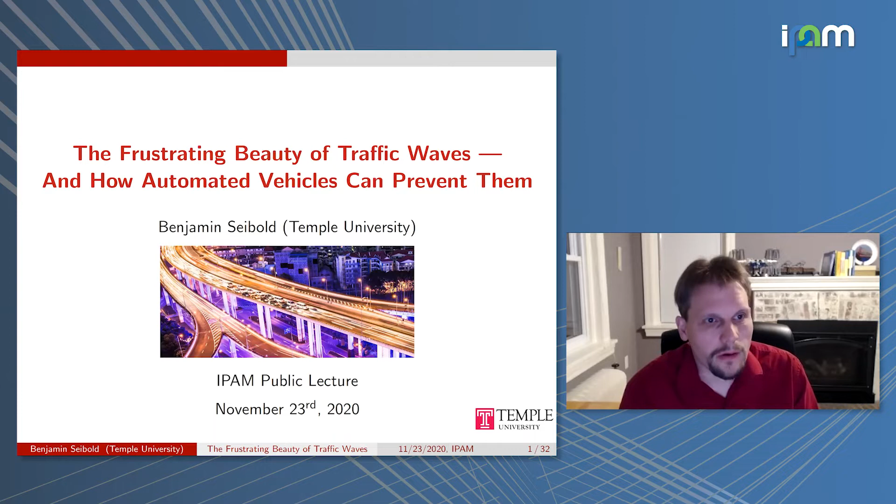So I hope we can have a nice tour of traffic flow, traffic waves, and automated vehicles. So I call this talk The Frustrating Beauty of Traffic Waves and How Automated Vehicles Can Prevent Them. So I'll talk a little bit first about traffic waves, then about instability, which is an important point here, and as a creator of structure, not just traffic waves, but many other things in reality, and then talk about traffic modeling and simulation, which is one aspect of IPAM bringing together many scientists from different disciplines to understand things, and then the role of autonomous vehicles or automated vehicles in the context of these traffic waves and what one can say, and then conclude what this could mean going forward.

So to dive right in, one phenomenon that many people probably have encountered when you drove is what people call the phantom traffic jam phenomenon. Essentially, it's a local slowdown, but there's no discernible cause. So you have to brake because the person in front of you brakes, you make the person behind you brake, and you look around and there's no discernible cause for this slowdown. And one can think of this oftentimes as, even if you initially have uniform traffic flow, it becomes unsteady, inhomogeneous, even in the absence of obstacles.

So unlike a traffic jam where you go fast and then you suddenly have to go slow, these phantom traffic jams are oftentimes traffic waves, in the sense that you brake, but then very soon after that, a few seconds later, you accelerate again. What you see on the top right is actually a long exposure picture at nighttime, and you see that most trajectories are blurred from the lights, except for these vehicles that you see there. So these vehicles over the exposure of the image were stopped. And you see it's only a localized stopping. So it's a beautiful picture of such a traffic wave.

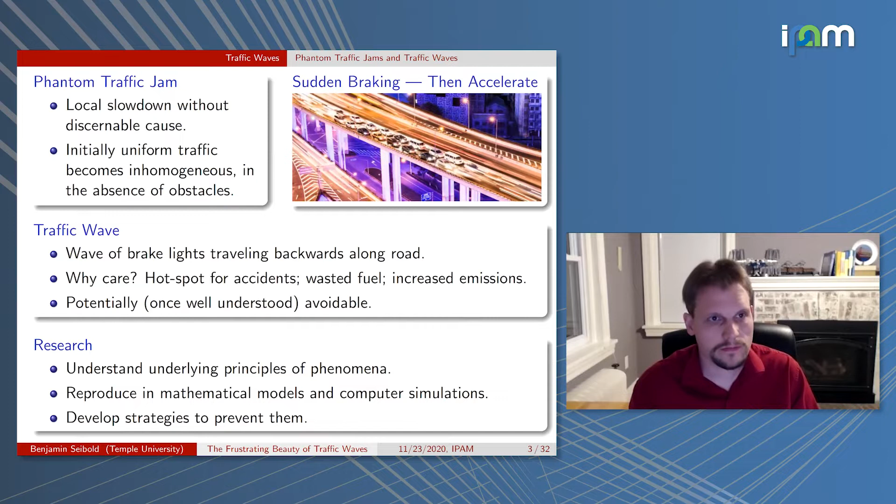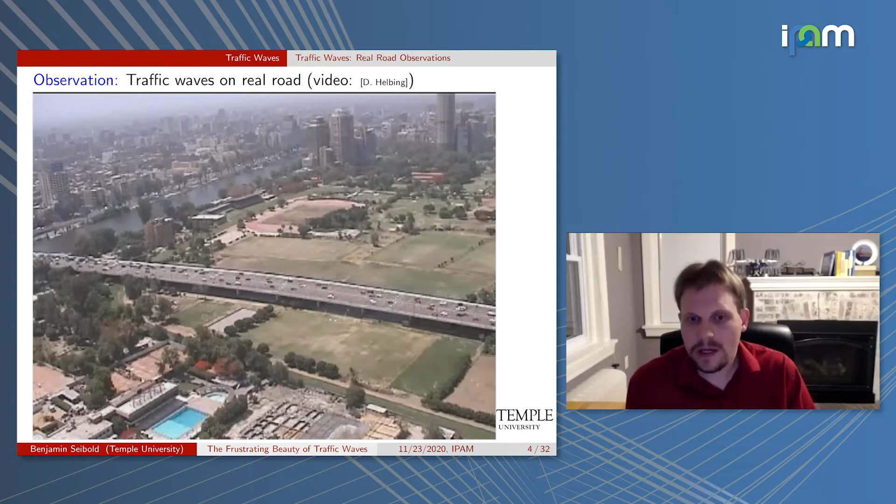So here's a video taken by Dirk Helbing. You see that the traffic leaving the downtown area is flowing relatively smoothly and uniformly, but the traffic flow going into the downtown, there's congestion, there's stoppage of vehicles, but the stoppage is localized. So you do see that, you see it here in some spots.

You see these waves that are traveling backwards, and they're waves of cars that are stopped, but the cars come to a stop for a few seconds and then accelerate again. So these are really stop and go waves. You see another one here on the screen. So these are stop and go traffic waves, and they're waves of brake lights that travel backwards along the road.

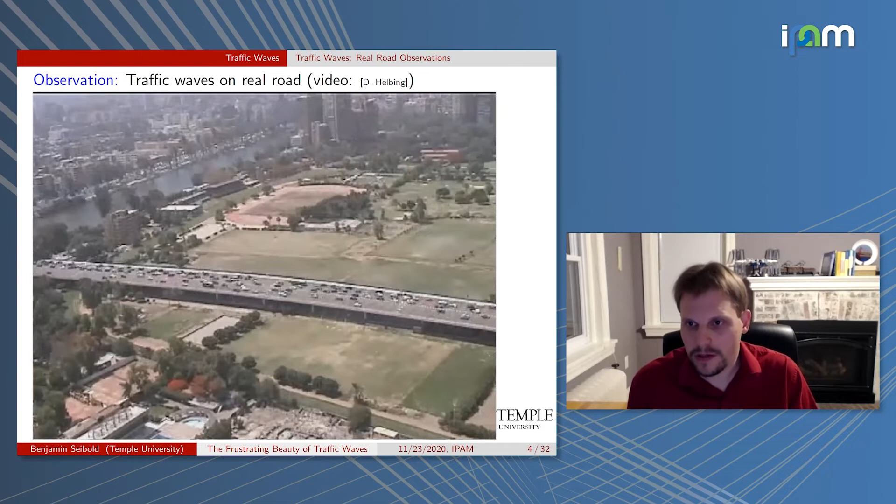Now there's a lot of things happening here. It's cars intermixed with motorcycles, with buses. You have on-ramps, you have off-ramps, you have lane changing. So it's not completely easy to pinpoint what exactly are the ultimate root causes for these phenomena that occur. Is it due to a lane switch, for example? Or would they also happen if you just had a single lane, no ramps, all passenger vehicles? Would you still get these stop and go waves, these traffic waves happening?

So in 2008, a group of Japanese researchers devised this experiment: essentially form a ring road of a single lane, and have drivers drive on that road. Initially, you see they start out uniformly spaced and driving all at the same speed. But it turns out that this uniform flow is actually something that the system does not dynamically like to have. The dynamics drive it away from that uniform flow.

So this was the first experimental demonstration that in fact, these traffic waves, these features that many of us have seen on the highways, these phantom traffic jams, can in fact arise from the simple car following dynamics, the simple collective driving dynamics of the human drivers on the road. It's not that one person triggers it, it comes from the collective behavior of all the agents. So that, of course, is a very, very important fact and a very important observation.

So you see that for a given vehicle density, the one that you have on this road, so the road has a certain length, you have a certain number of vehicles. So it's in this case, 22 vehicles per 230 meters. So for that vehicle density, it turns out that the uniform flow, the desirable flow, everybody goes at the same speed and is equispaced, is actually unstable. So the dynamics drive the system to a different state, not the uniform flow, and in fact, the traveling wave state. And this structure, again, emerges from the collective driving dynamics.

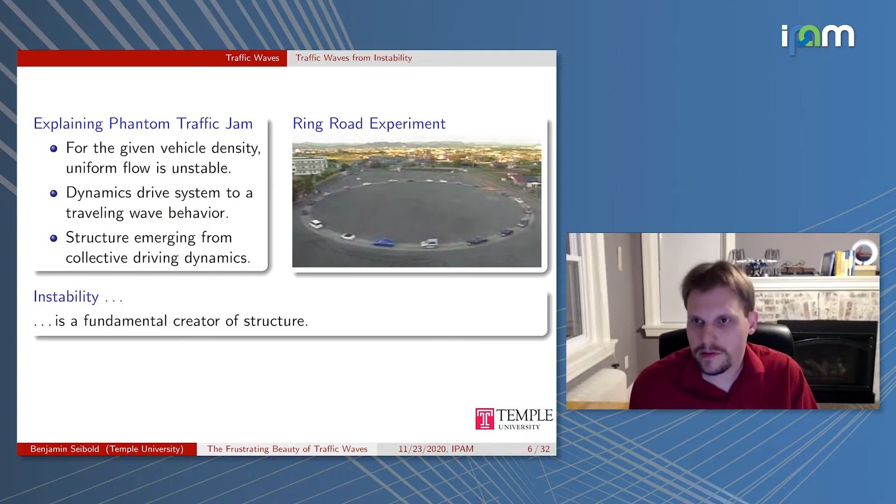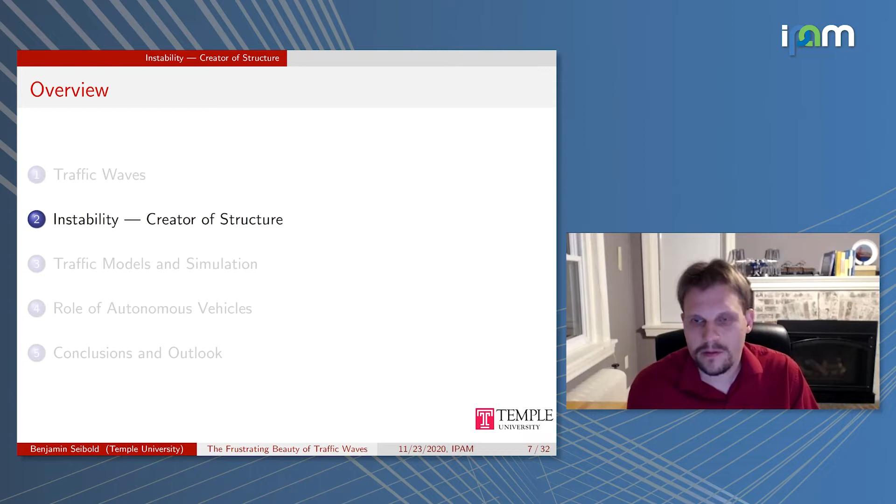So what is really forming these structures, forming these traveling waves here, is an instability. And instability is actually something that does not just arise here in traffic flows, but is really ubiquitous in reality. And of course, also is really interesting to describe. And in fact, I want to move forward by highlighting some of these aspects. So I call this section here, Instability, a creator of structure, because I really want to highlight how ubiquitous, how wide these instabilities are in practice, and how many phenomena and structures that we see are ultimately formed by instability.

But of course, there are always imperfections. There are always small perturbations. So what distinguishes stability from instability, so a stable equilibrium from an unstable equilibrium, is exactly how does the system react to small perturbations. So a stable equilibrium means that small perturbations decay. If you have a pendulum that's hanging down and you perturb it a little bit, the dynamics bring it back to where it started from.

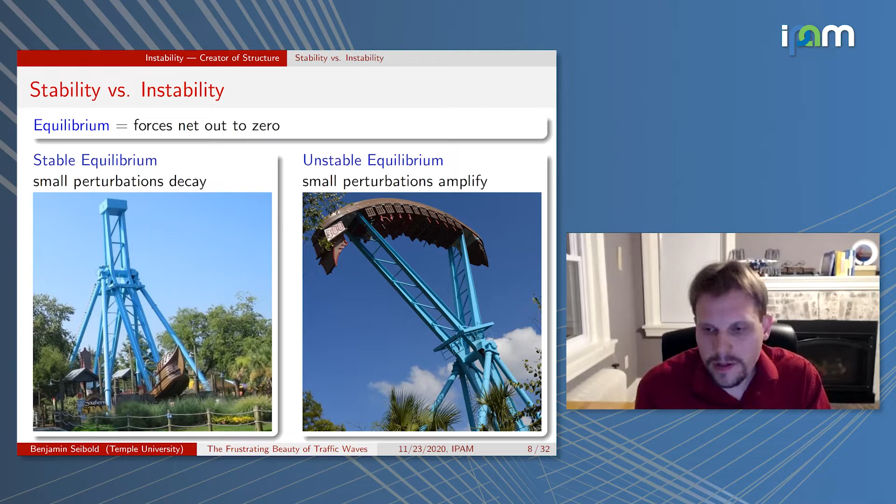How can you explain it? Well, you have an initially flat ocean surface, then you have some wind blowing across the surface. Now, to get the mechanism of instability, you always need to think, what if I had a small perturbation? So what if you had a little bit of a hump on the water? Very tiny. Well, what would happen is that hump now would provide more possibility for the wind to catch on. It would push the water sideways and therefore a little bit upwards, up the hill, and therefore amplify this crest, amplify and therefore grow it.

So whenever you have a mechanism that if you start with something that's initially uniform and you perturb it a little bit, you have a mechanism that amplifies this perturbation, then you have the mechanism for creating structures, in this case, waves on the water surface.

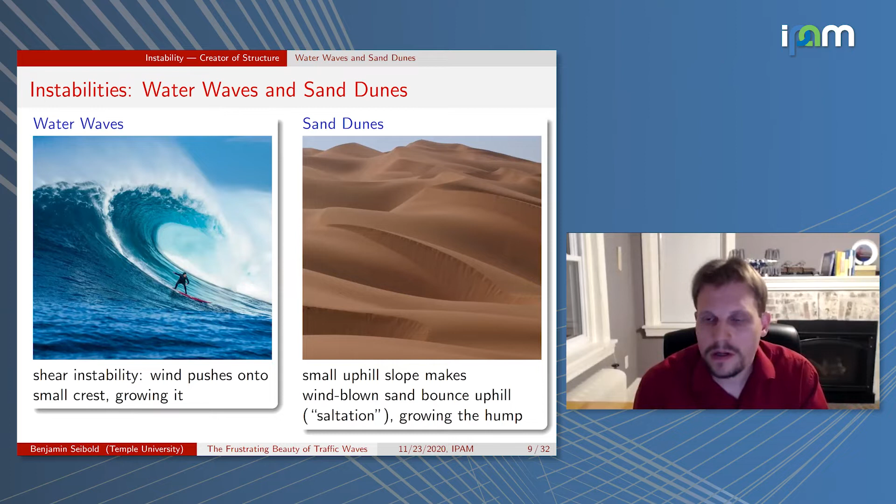Sand dunes follow similar principles. So if you start with an initially flat sand and then you have a little bit of a hump, then wind blows sand, and once you have a hump, it acts like a little ramp and it can catapult sand grains upwards. This is called saltation, and therefore then growing the hump. Now, not every wavelength of humps does it, but there's certain wavelengths where they actually get a growth, and this can grow to sand dunes that are hundreds of meters high.

Snow is white, ice is white, therefore it reflects a lot of sunlight. The water is darker, so it absorbs more sunlight. So at the moment where you get a small amount of water, that water now warms more than the ice, according to sun radiation, and therefore growing that structure that you had. So you start with a small perturbation and that structure grows, and therefore again you have the mechanism for an instability.

Defrosting in a microwave oven. Why do microwave ovens have a defrost button? What the defrost button does is it essentially heats things slowly. It heats for 10 seconds and then it has 20 seconds break in between. If you didn't do that, what would happen? It turns out that microwaves heat liquid water much more efficiently than ice. So if you get a little bit of water forming, that water will be heated much more rapidly than the ice around it. So if you do it too quickly, you can actually get boiling water right next to ice. And obviously that would not lead to pleasant food.

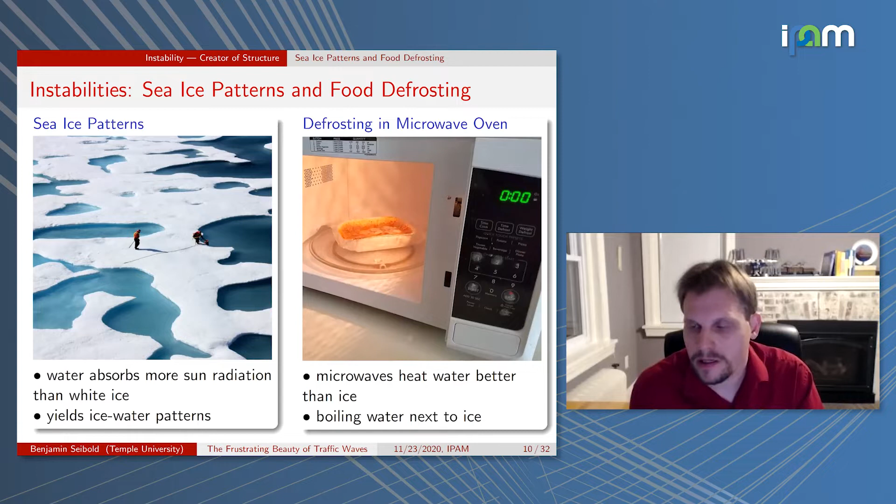Fluids are a prime example where there's a lot of instabilities happening. For example, if you turn on a faucet, just slightly so, initially you get a stream, but at some point the stream starts forming bubbles and droplets. So you get droplets that break off. Again, what is the mechanism? You start with a uniform stream initially, but then you have some small perturbations to it, some small imperfections.

But at the moment where the water stream becomes more narrow at a point, the surface tension contracts it more at this point than in the wider parts, and therefore amplifying the structure and eventually leading to droplets forming and breakup.

Or, of course, beautiful structures like the Grand Canyon ultimately result from instabilities. You start with an initially flat terrain, and then you have a little bit of a dip, a little bit of a channel that's forming. Rainwater will, of course, then run into that channel and therefore deepen the channel. So initially you start flat, you have a little perturbation, and then this perturbation amplifies, and over the course of millennia and then millions of years can form whole canyons that result from it.

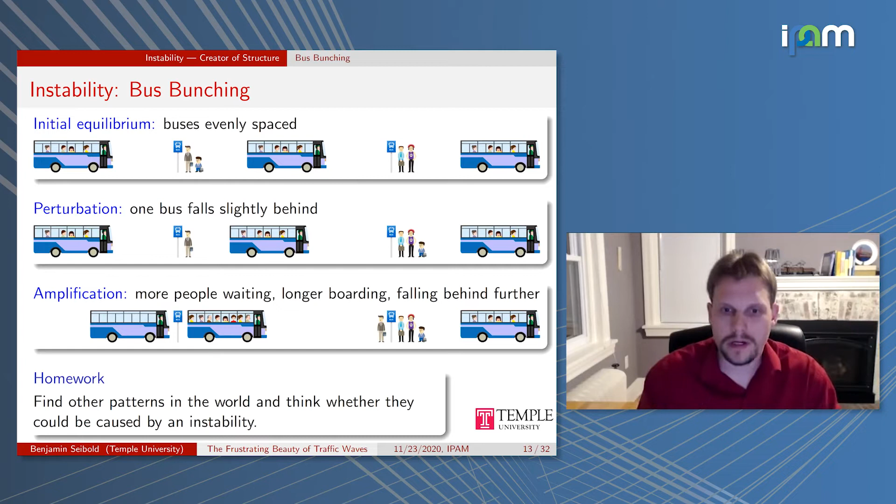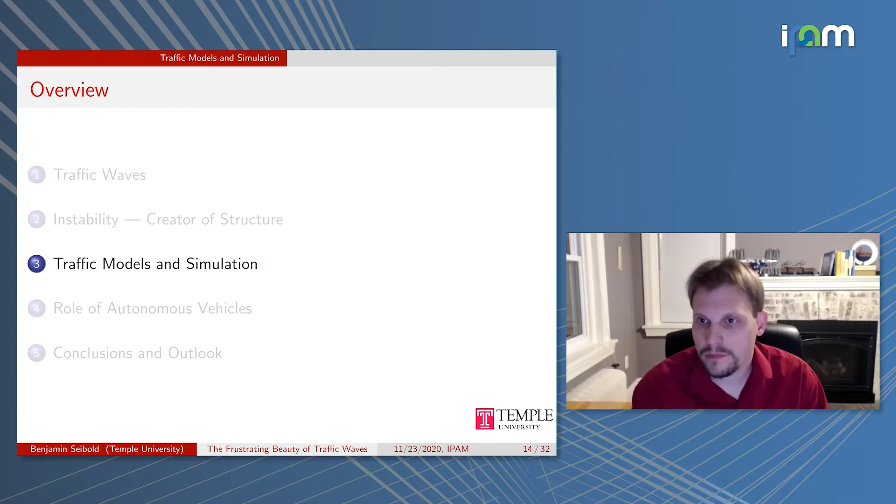Now, having conjectured that traffic waves can be caused by instability, of course, one needs to check whether this is plausible via mathematical models and also computer simulations. So traffic models and traffic simulation is something that transportation engineers, but also mathematicians, physicists, engineers are very interested in, because ultimately it's about understanding this real-world phenomenon.

And when it comes to developing models that describe or reflect reality, or simulations, one can, of course, and should ask, what is the point of this? Why are they needed? Why don't we just observe traffic flow as it exists and classify what one sees and measures? And this is an important question. Why develop and study models of reality? That is not just a question for traffic flow. It's true about every system that is out there.

Well, the first point is you can reduce system complexity. Most real-world problems are extremely complex, but in modeling, you can isolate a few key mechanisms and then test and understand whether they are the dominant mechanisms that form and govern the structure. What is important to remember here is the quote by George Box: all models are wrong, but some are useful. So the goal of modeling is not to describe every single detail about reality, but in fact find the conceptually simplest description that captures the key mechanisms that describe the phenomenon.

So for traffic waves, of course, the question is, what are simple models that capture the instability and produce the wave behavior? Once you have a mathematical model formulated in a mathematical language, you can use computational resources to simulate the model and see what would happen if you, for example, changed model parameters.

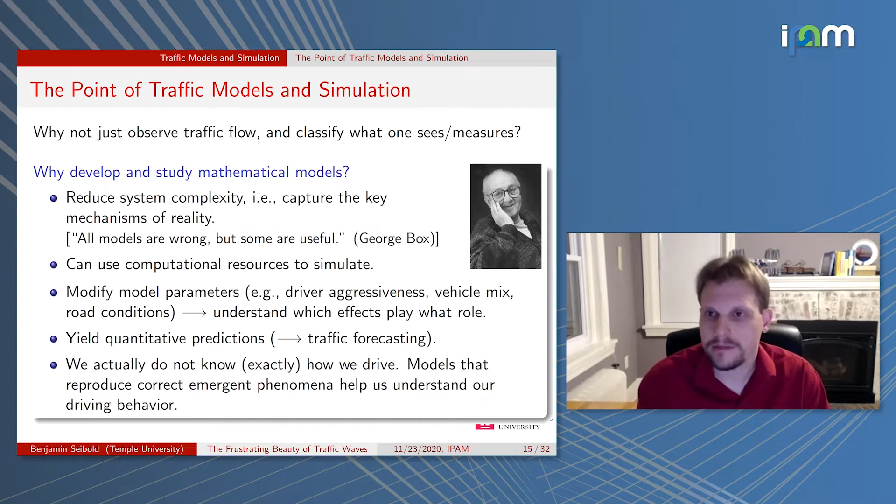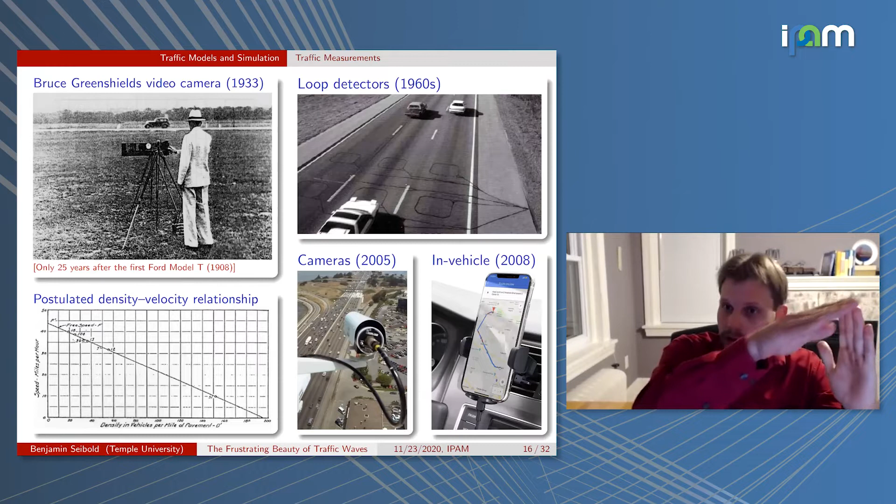So in other words, the speed is some decreasing function of the traffic density. If you have more cars, the average speed of traffic flow is lower, and this is not just a qualitative statement, but a quantitative relationship.

Of course, since then, traffic data collection has gone a long way. In the 1960s, loop detectors were put into roadways, like you see here, that count cars and flow rates and speed estimates. Of course, there's camera systems here, like in this case, this is from a 2005 data set that collects on a segment of highway the trajectories of all the vehicles that then can be used by researchers to get really fundamental insights into car following behavior and driving behavior.

And then obviously disruptive technology was the fact that nowadays almost everybody carries a GPS transmitter with them, and we're willing to transmit our position in exchange for getting quality routing. And this, of course, can also be leveraged to get lots of information about driving behavior.

Now, the difference here is that this was a transition to essentially mobile sensing, so in-vehicle sensing, whereas the traditional means were dedicated infrastructure put into place by agencies. Later, we'll come back to that point also from the point of view of traffic flow control.

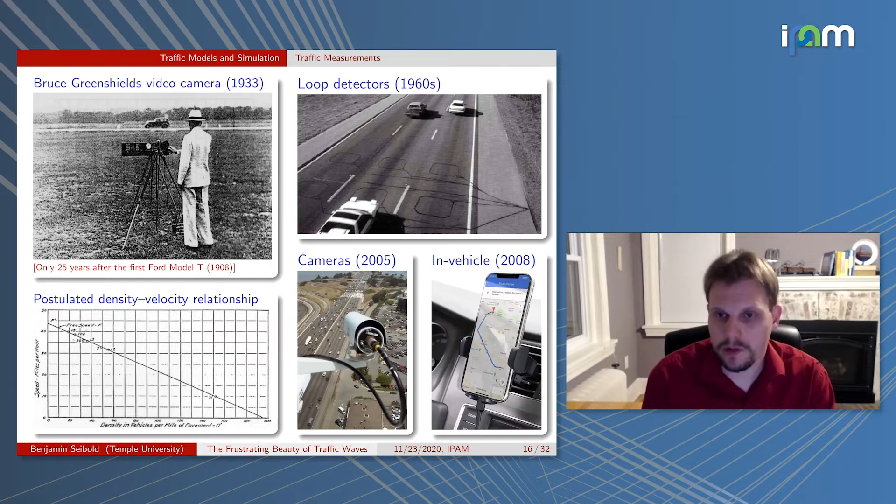Now, once one has some relationship, for example, as we saw in Bruce Greenshields' measurement, you might have a relationship between, for example, the speed that cars would like to go and the gap between two vehicles. So what do we mean by this? You have one car following another car, for example, in one lane on a highway.

The car, let's say front bumper is at a certain position. I call the position X. The car goes at a certain speed. Let's call this V. Of course, the car and the car ahead have a length, and then you have a gap between the cars. So how much open space there is between my front bumper and the rear bumper of the car ahead of me.

And now I can collect data and see that to a reasonable approximation, I actually get a relationship between the speed that cars want to go and the gap that arises. If the cars are very close, bumper to bumper, that speed is 0. And then the speed increases as the gap increases up until, of course, the gap is so big that I cannot really go faster and faster, because at some point I would get a speeding ticket.

So this, of course, will level out at the speed limit, or depending on where you are, the speed limit plus 5 or 10 miles per hour. So this is an empirical law of traffic flow that you could measure. And of course, real measurements will be clustered around here, but you could say this is an approximation.

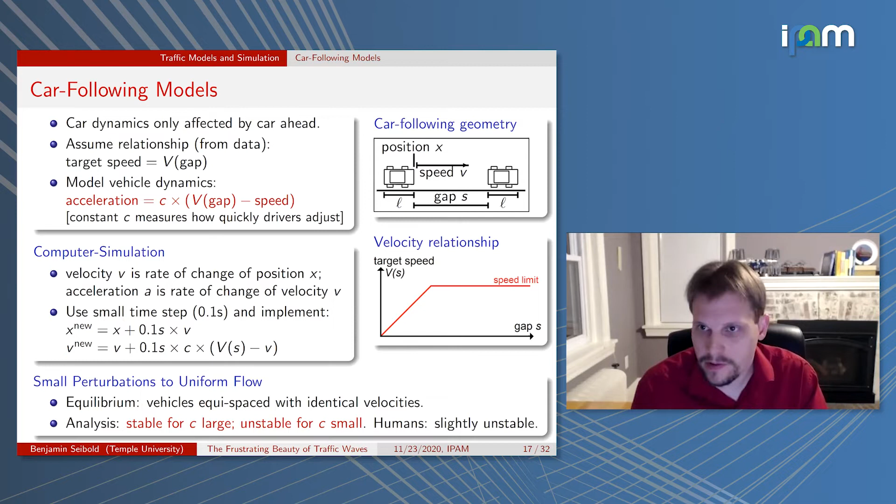And it turns out for this choice here, if that constant C is large, if drivers adjust quickly, then uniform flow is stable and the system will remain close to the uniform flow. On the other hand, if C is below a certain threshold, then in fact you get an instability. And since we know that traffic waves and instabilities and phantom traffic jams happen with real humans on the road, one can actually make this a model for reality by choosing C sufficiently small, but not too small, so that you have slight instability, and that is now a model for human drivers. So since this is a talk of a math institute, here are some equations. The rest will again be very pictorial going forward.

So for example, here you see a video of such a simulation. At the bottom, you see what it means to the individual vehicles. At the top, you see what it means to the traffic density, to the vehicle density, which is this blue curve. And you see that this simulates the evolution forward in time. In fact, there's some theory that might even predict what this traveling wave will be forward in time. That's the orange curve. But you see that whatever goes out on the right comes in on the left. So it's really a ring road that you have.

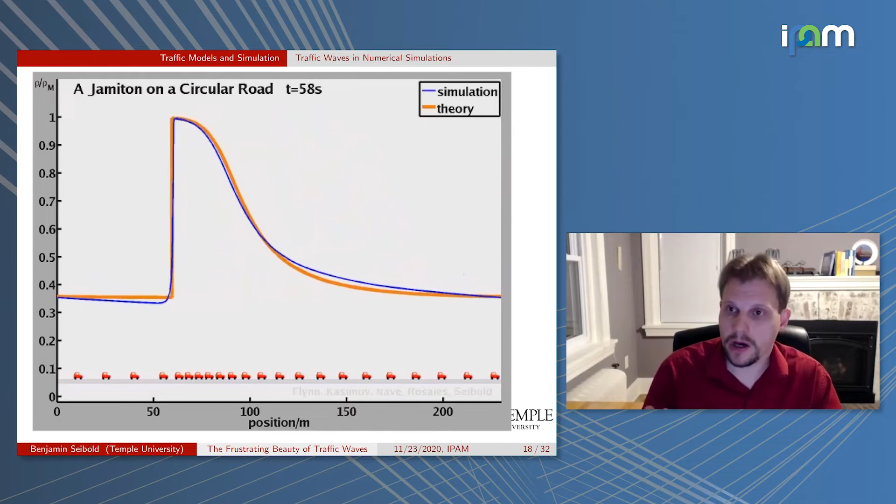The vehicles here form a traveling wave that goes backwards on the road. Every vehicle brakes heavily and then accelerates again. And there's a local region where the vehicles are very slow. So this resembles really the ring road experiment done in 2008 by the Japanese researchers. So this really resembles in simulation what one saw prior. Now, one has a model, and this model, of course, can not just reproduce a ring road.

You can also, of course, investigate what happens if you look at a really long road, 6 kilometers of road now. So 4 miles of road, you had a little bit of perturbation. You have a uniform state that is dynamically unstable again. So these small perturbations here increase the density. More cars get localized in a certain spot. You get this typical braking behavior here happening along the road. These are a lot of vehicles here. So these are zooms here, but these are a lot of vehicles down here. So it really makes more sense even to look at it on the level of the traffic density.

Now this initial pileup, this initial wave now produces a dip downstream. That triggers another instability, triggers another traffic wave. This triggers another dip, another wave, another dip. So you get this whole chain, this whole train of baby waves being born out of the lead wave.

Now, this model now has something to do with reality. It means that if you had a phantom traffic jam, you had to brake because the person in front of you brakes and you look around and you don't see any discernible reason, it is likely that somewhere downstream, 30 seconds later, 1 minute later, you will have another one of these sudden stoppages. And again, that oftentimes agrees with what is being observed in reality.

But it also means from these models that all these drivers are actually identical and they behave exactly the same way and fully predictably. Nevertheless, uniform flow is unstable, small perturbations amplify, and what you actually get is these stop and go traffic wave solutions. So they can arise from the collective driving dynamics of all the drivers on the road. You don't need any bad drivers who are at fault at causing these waves.

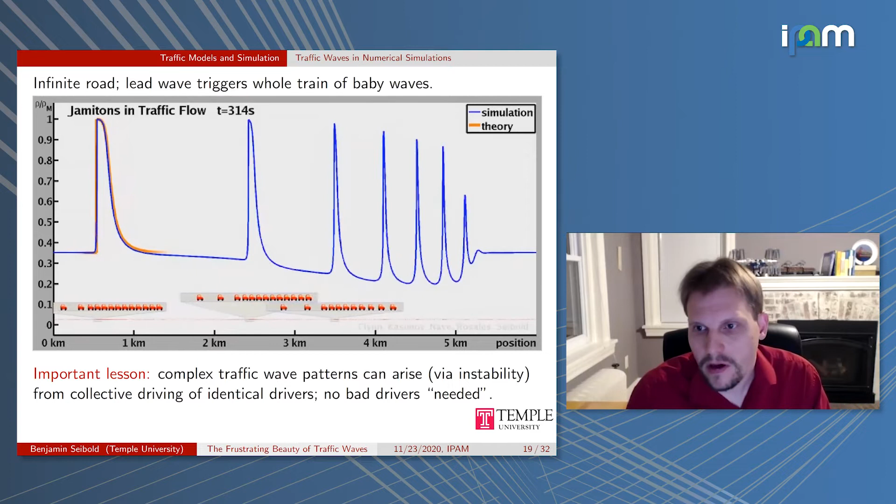Now, that does not mean that there are no bad drivers on the road, but it means that these phenomena can arise even if you have nobody being at fault at causing these waves. It's really collectively us causing it. And one reason why we might not be aware of it is, of course, that what happens due to our driving behavior happens behind us, so we don't necessarily see the consequences of us amplifying wave behavior.

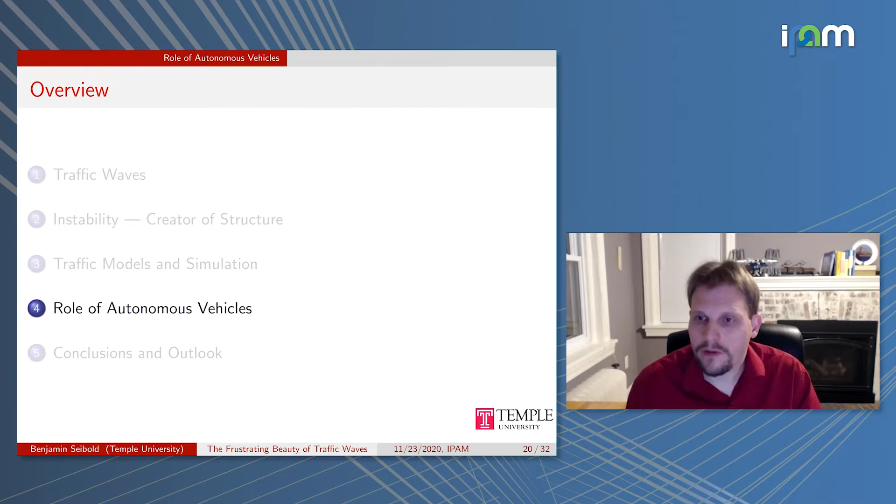All right, so this is what happens on real roads, and this is how we can understand what human drivers do. So now one needs to ask, what is the role of autonomous vehicles in this context? So a common impression of autonomous vehicles is that at some point they will be there, created somehow, and we will suddenly have all the vehicles being autonomous. We don't need to deal with the chore of driving anymore. We can lean back and enjoy that a car does the job for us.

The reality is that fully autonomous cars that don't have a steering wheel, where we can lean back, are really still a distant future. I will say on the next slide some reasons for that. But it turns out that if you talk about automated or semi-automated vehicles, there's a lot of very, very smart technology already in modern vehicles that one can buy, not just the high-end vehicles, but really consumer-grade normal vehicles have, for example, lane assistance. They have adaptive cruise control systems, a cruise control system that doesn't just keep a constant speed, but slows you down as you run closer to the car ahead, so you don't need to disengage it, even in heavier traffic.

So there's a lot of potential due to vehicle automation and also vehicle connectivity, vehicles exchanging information with each other, that can be explored and might actually modify the way traffic flows in the near future. And particularly interesting, of course, here is the question: could vehicle automation dampen these traffic waves and prevent the instability from arising?

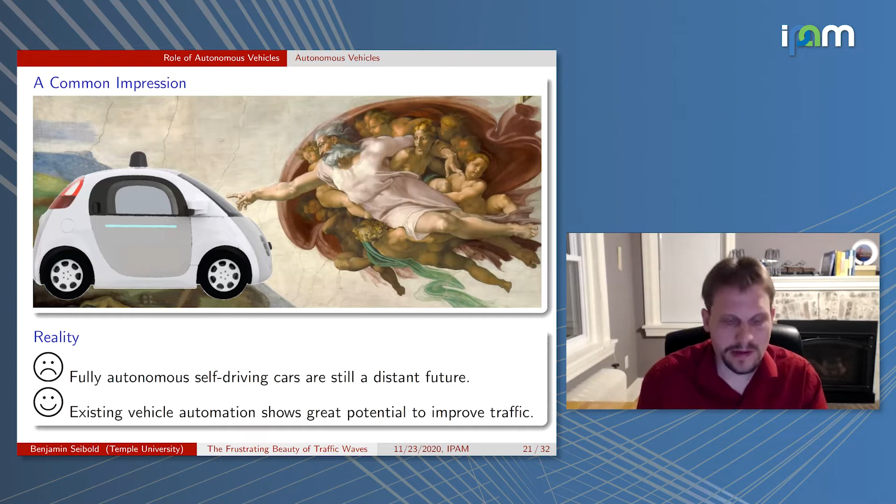So I said before that fully self-driving cars, what people call level 5 autonomy, mind off, there's not even a steering wheel in the car, that definitely will not happen in the next 10 years. And a few reasons are just that human drivers are very good at interpreting context, and they know when to bend the rules.

For example, is this a stop sign? Well, clearly it's a stop sign. And modern image techniques can probably recognize this as a stop sign. But is that one that one should follow? Probably not if you're a human driver, but think of all the possibilities of what could arise where the context information tells us how to drive, or we have a sixth sense that this intersection must have a stop sign and it must have fallen off in the wind, for example.

There are also examples where, in fact, small perturbations to stop signs in some computer perception techniques can even mislead the perception to thinking they're speed limit signs. I did not put a slide on here, but you can Google this and look this up. So there's a lot of challenges also in making computers perceive the real world in a way similar to what we humans do. It is a really, really challenging problem that requires a lot of work.

Another aspect is that it's not always that the cars are amongst themselves. There are many situations where cars interact with humans. And especially in Europe, you have situations where there's not even clearly defined rules. You see, there's no clear separation between the pedestrians and the cars. There's sort of a common law type of understanding, and humans adapted; the drivers know what to do, but they're not able to formulate this and cast this into precise rules. So making a safe perception algorithm and implementation in a fully autonomous vehicle that can do this is still something that development is not close to doing.

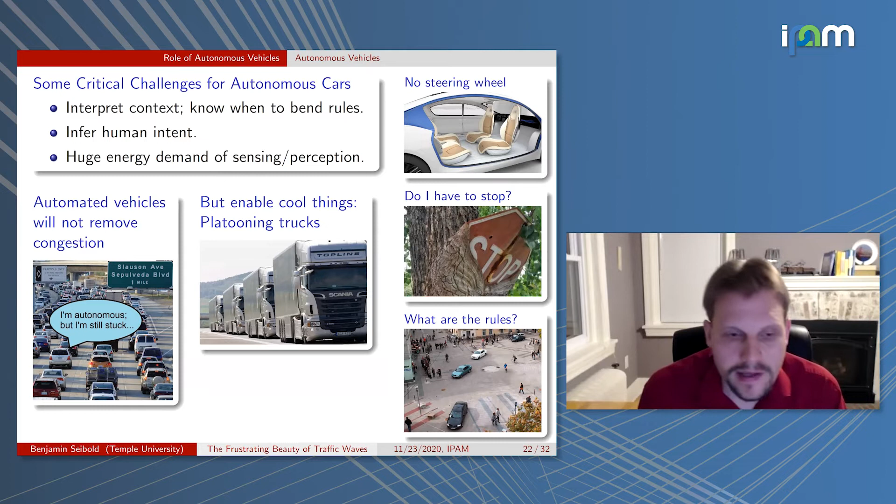You see it in this little depiction here, right? Your car can be as autonomous as you like; if you're stuck in traffic of traditional vehicles, you're stuck in traffic, right? There's nothing you can do about it if this is the only route that you need to take. So large-scale congestion we still will need to deal with. But of course, maybe you have congestion, and instead of driving unsteadily, brake, accelerate, you could maybe drive slowly but steadily. So the idea of dampening waves still has a lot of merit,

What if one vehicle, and only one, had a smart controller that has velocity automation, so it can choose its speed automatically based on sensing what the cars ahead are doing and the cars around are doing, in a way that it has the goal of dampening the waves?

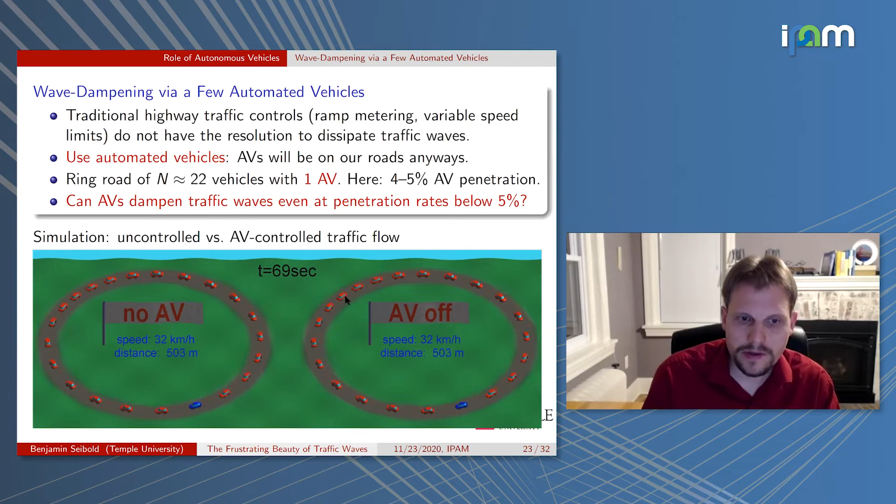But now what will happen at 120 seconds is that on the right, and only on the right, this blue vehicle will be turned over to an automated velocity controller. So you see it now at 120. So now the blue vehicle has turned over to a velocity controller that is specifically designed to dampen the waves. What is important is that the red vehicles have not changed anything about their driving behavior. They're driving by the same principles as they did before.

But one vehicle driving in a smart way, constantly observing what the other cars are doing and aiming to dampen the waves, actually suffices at keeping the flow close to a uniform flow profile. And you see that this not only dampens the waves, it makes the average speed of the flow also faster, because this blue vehicle now is much more ahead than in the reference situation where you still have the waves.

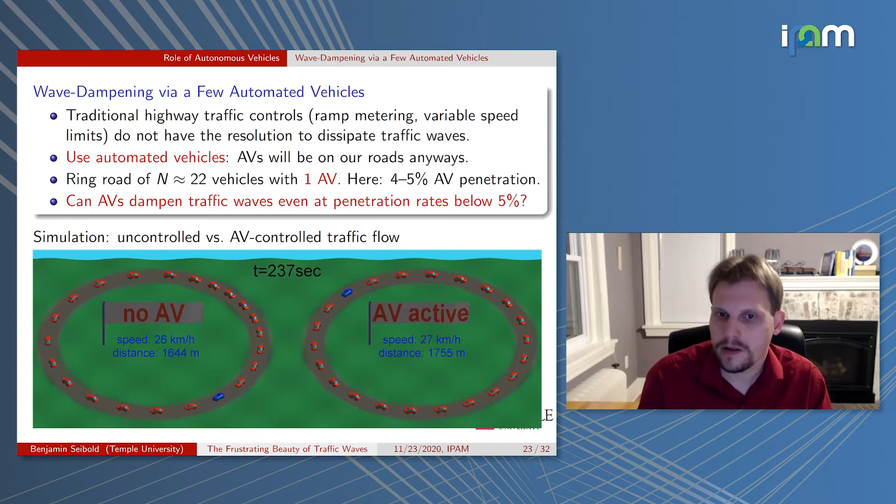So this looked very promising. And it could hint that with just a few smartly controlled vehicles, you could really dampen these stop-and-go traffic waves in reality. Not get rid of large-scale congestion, but dampen these waves. But this was in simulation only. And of course, all models are wrong. All simulations have to be taken with a lot of care. Ultimately, you don't know for sure until you tested it on real roads, or at least in an experiment with real vehicles.

So a research team went out. You see here some of the team members, including myself, in the desert of Arizona. It was in July in Arizona where this was carried out. So there's a lot of interesting stories about operating equipment and humans at high temperatures. But we had a 360-degree camera in the middle. We had a traffic circle reproducing the ring road experiment that you saw before. We had sensors in the vehicles that tabulated the speeds and the fuel consumption of the cars.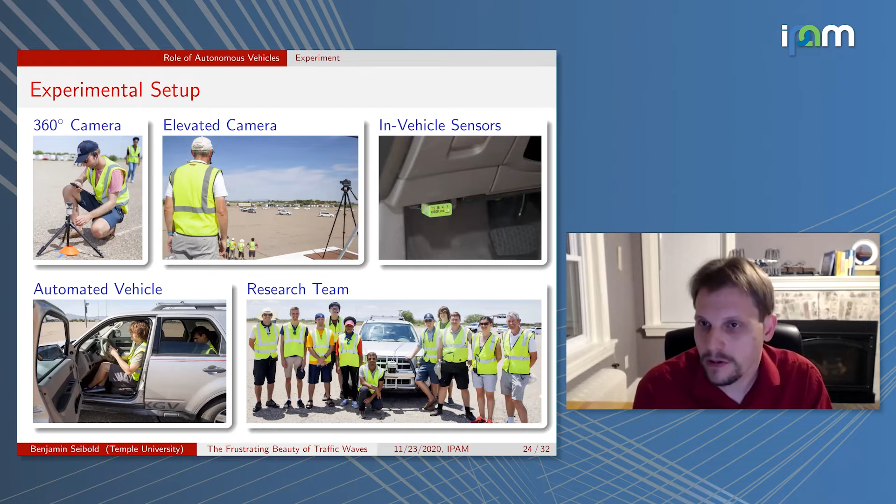And we had one single automated vehicle here that by the student in the backseat could actually be controlled via his laptop, and control algorithms that were programmed specifically with the goal to dampen the waves. And here are the results of that experiment. So you see initially, every car, including the control vehicle, is human controlled. So you see that the instability kicks in. So we're reproducing the instability. Now you start seeing these waves forming.

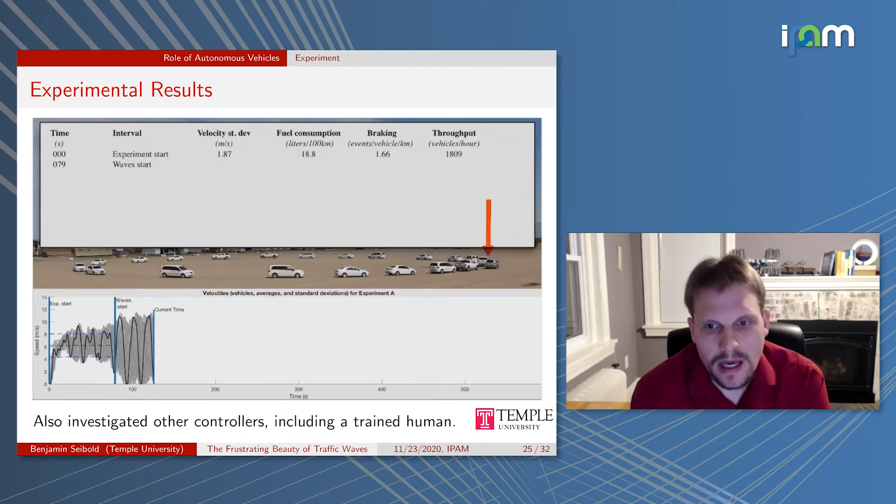This is sped up by a factor of 6 here. So in reality, it was slower. And now the velocity controller is turned on. So the velocity controller tries to drive at a constant speed rather than following the waves, which means that in the beginning, when the cars ahead of you are accelerating, you don't follow the acceleration as much. And as a consequence, you see that it did reduce the variation of the speed.

So the gray curves here are the speed profiles of all the cars, and how much they vary tells you how much the velocity variations are. And you also see in the video right now, this is the best controller here. Pretty much the car leaves a little bit of a larger gap, but ultimately it has successfully dampened the waves.

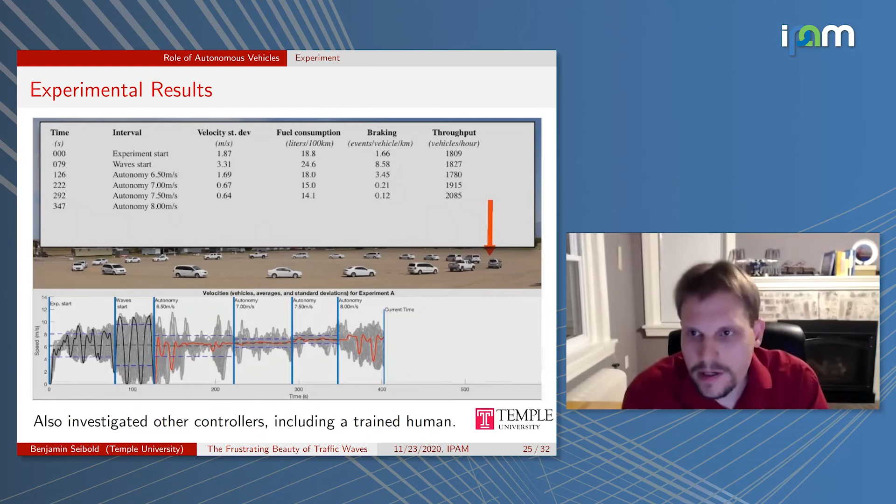And then you look at the metrics here and compare the situation where you had the waves, which is here in this regime where you have essentially going very fast and having speed 0, and compare it with the best controller that was tested out here, and can compare the traffic flow in terms of key numbers.

For example, we measured the fuel consumption of all the vehicles on the road. That is important, not just the control vehicles, but all the cars on the road. And what turns out is that the fuel consumption is almost cut in half. It is reduced by 40%.

So if you control for traffic waves and dampen them, you have about half the fuel consumption of the whole traffic flow compared to if you had these strong waves here. Strong braking is reduced by a factor of 70, so it's essentially cut to 0. The velocity variation, you see it here, is much, much less than you have here on the waves.

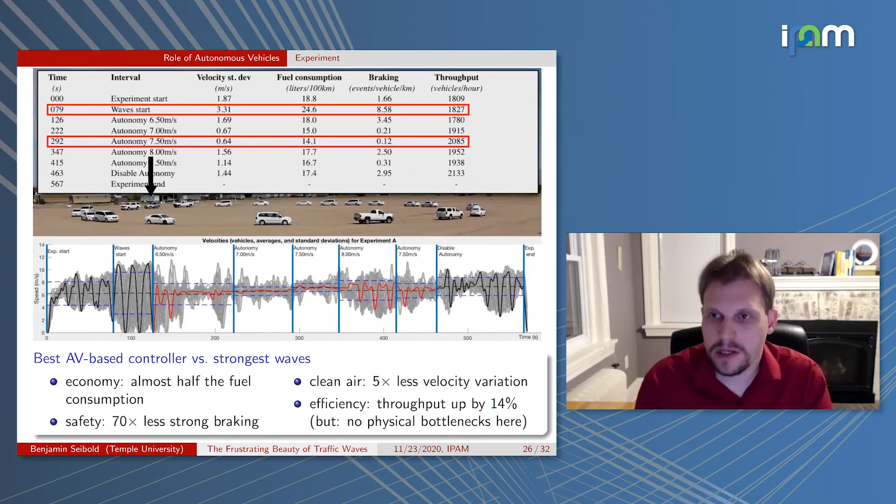And also, similarly to the simulation we saw before, the travel time went down by 14%. So the throughput, the average speed went up by 14%.

We also looked, based on models for vehicle emissions, on how this would now manifest not just in the fuel consumption, which we saw here was reduced by 42%, but also in terms of vehicle emissions. Vehicle emissions have multiple aspects. There's greenhouse gases, for example, like CO2, but they also have aspects that are generally associated with dirty air or pollution, like nitric oxides, NOx.

And you see that the control here, the dampening of the waves, reduces not just the fuel consumption, it also reduces the emissions. But some emissions are reduced much more substantially. For example, with regards to clean air, this wave dampening is even more promising in terms of the impact. You see a reduction by 74%.

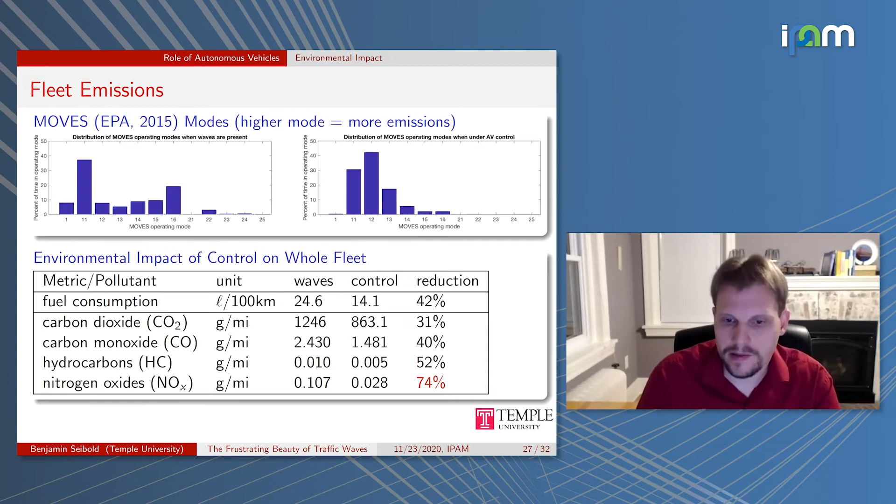And the reason is that with combustion engines, brake, accelerate, leads to very inefficient combustion, and therefore has much, much more exhaust of nitric oxides. So regularizing the flow actually has severe, very, very strong consequences.

We also noticed there's a lot of interesting things in these experiments. For example, that the instructions that the drivers are given actually do play a role. In fact, at first, we gave the drivers more or less the instructions: safely follow the vehicle in front of you, as if you were in rush hour traffic. And as a result, we did get these blue data points here. So you see the wave strength here in some measure is down here, and the fuel consumption here is down here.

And then we noticed these waves are not as strong as you sometimes observe in some of the videos that we knew. So we gave the drivers the instruction, drive as before, but in addition, place an emphasis on closing the gap to the vehicle in front of you whenever safety permits. In other words, you don't like to have too much of a big gap ahead of you. You drive in some sense aggressively, right? You're impatient as a driver. You drive still safely, but you close gaps ahead of you.

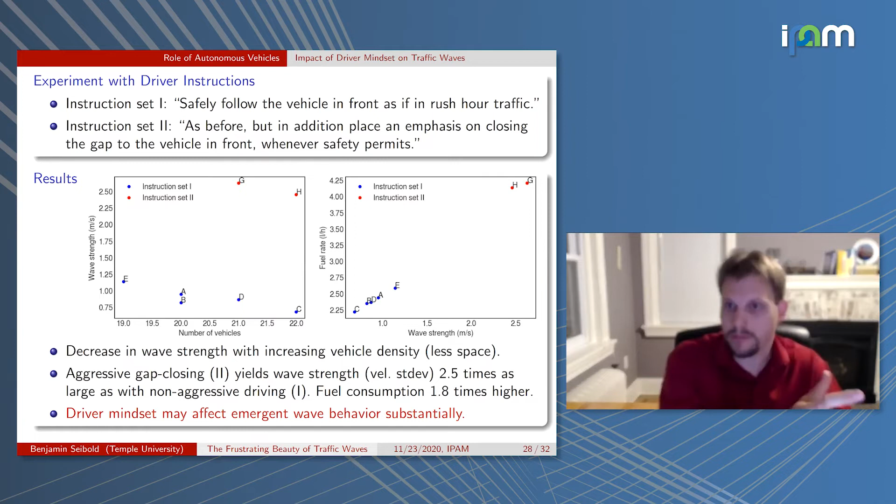And as a consequence, the wave got much stronger here. You got these data points here. And you also see that the fuel consumption went up quite noticeably. So in other words, the driver mindset, how relaxed versus how impatient or aggressive the drivers are, also affects the wave behavior substantially. And of course, that can also be inputted into the models and the simulations as well.

Another aspect that in this context is very interesting to look at is that what we tested before was one vehicle that had a carefully designed velocity controller. But as I said early on, existing vehicle technology has adaptive cruise control. So several vehicles you can buy on the market have adaptive cruise control systems. So the vehicle slows down automatically if it has to, because the car in front of it slows down.

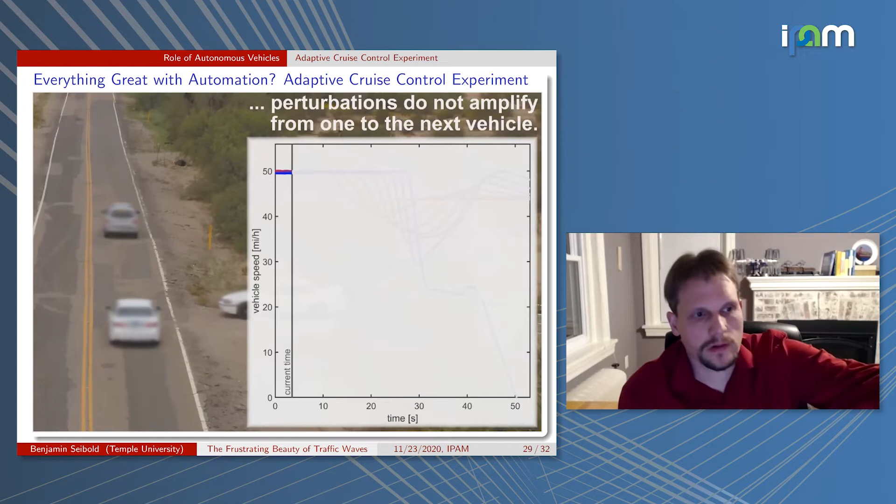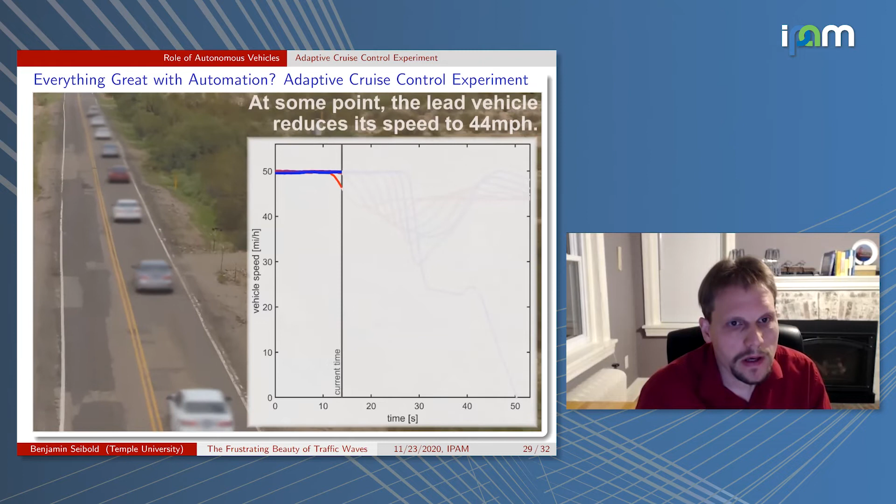So one question is, what happens if you take a train, here you have a control vehicle that leads, and then you take a chain of 7 vehicles driving behind, all of which are identical vehicles with an existing adaptive cruise control system that's available on the market. Now, what happens, you see it here, the lead vehicle drops its speed from 50 miles per hour to 44 miles per hour. And as a consequence, the other vehicles slow down as well.

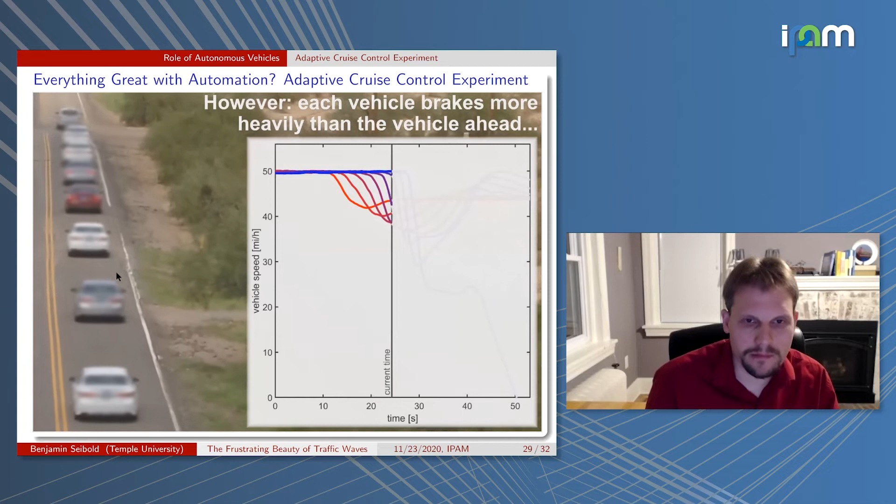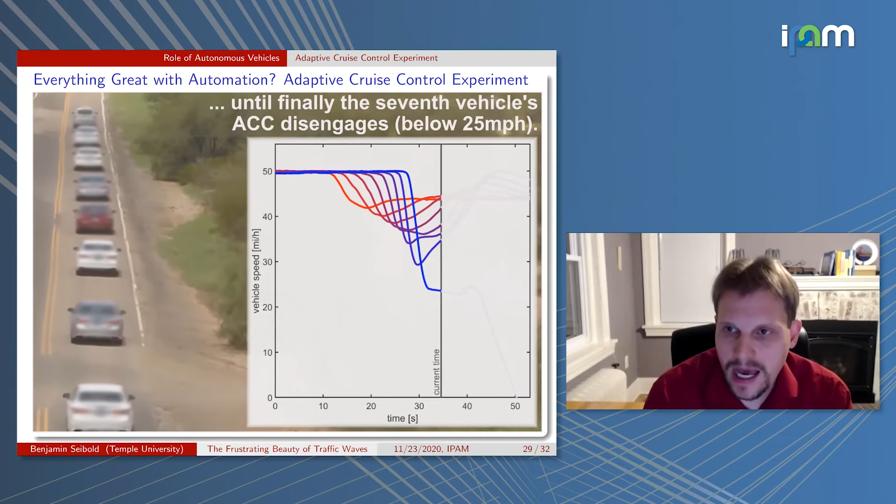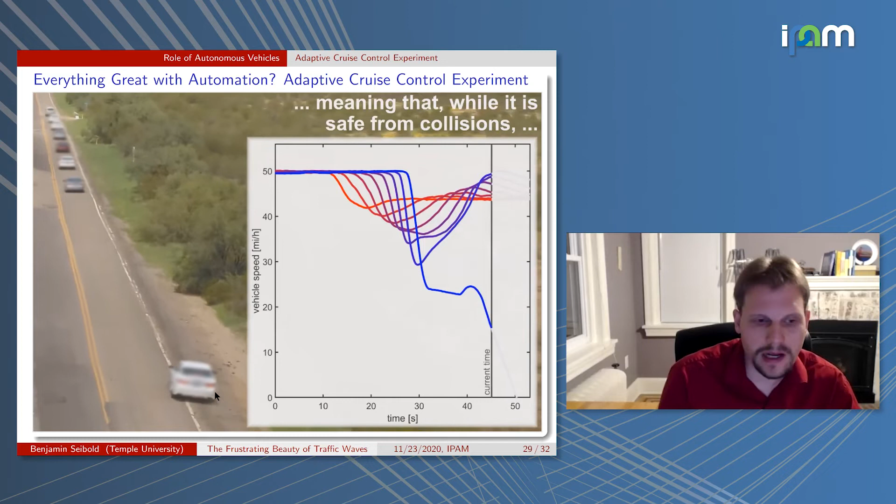But what turns out is, this is all not humans, it's all the adaptive cruise control system. What turns out is that this slowdown actually amplifies. So this is another form of an instability that kicks in here. And it actually goes so far that the last vehicle is actually knocked out of its adaptive cruise control system. It turns itself off once the vehicle gets below 25 miles per hour and then pulls over on the side.

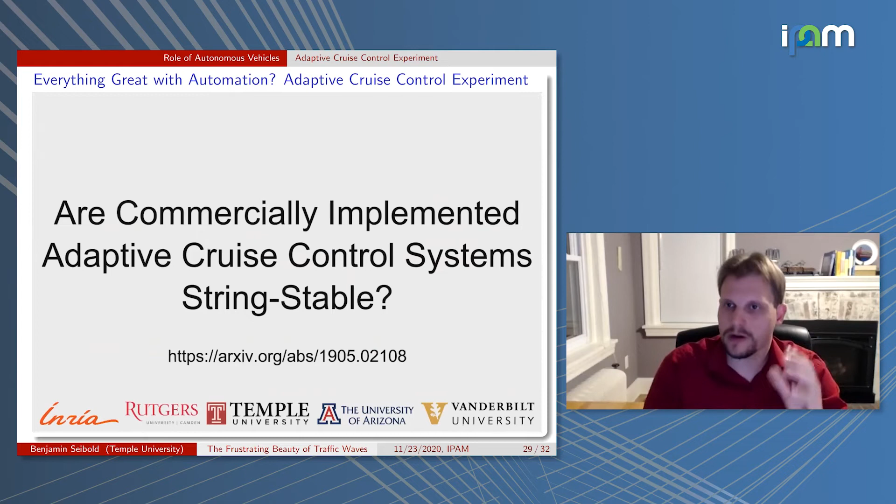Eventually, the system goes back to the correct uniform speed, but at the expense of producing substantial braking that gets stronger and stronger and stronger from vehicle to vehicle. So instabilities are not just something that can happen with humans on the road. It can also happen with some of these automated systems if they're not designed with string stability in mind.

So there's still, of course, development to be done on many of these systems as well, and especially understanding what happens when these systems are combined with human drivers on the road. Here, likely, human drivers on the road might actually prevent some of this strong braking. At some point, humans might regularize the flow, in contrast to having the automated vehicles by themselves being unstable. Many of these questions are yet unanswered. There's a lot of work to be investigated via models, experiments and other studies.

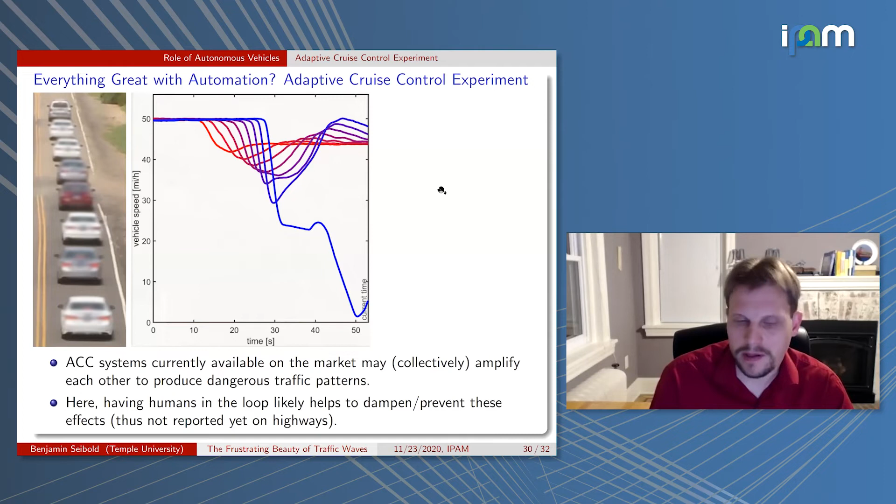So to conclude, phantom traffic jams and traffic waves that arise on real roads can be explained from the collective driving behavior that happens on roadways. They are caused by instabilities, and that connects them with many other beautiful structures that arise in the world. And in fact, if you're not stuck in traffic and you can observe these waves from the outside, they're actually quite beautiful as you see them traveling backwards.

At the same time, of course, they are undesirable to the drivers themselves, cause wear and tear on material, and of course, increased fuel consumption and emissions. So you want to get rid of them. And it turns out that just a few well-controlled automated vehicles can remove these traffic waves, and therefore this has tremendous fuel consumption and emissions consequences. So this leads, in a sense, to a new paradigm: the idea of using automated vehicles as moving traffic flow controllers.

Existing control measures are usually stationary. So ramp metering, having traffic lights on on-ramps that limit the amount of cars that can go in, variable speed limit signs. These are substantial infrastructure investments. Automated vehicles will be on the roadways anyway. So it's almost a free lunch if you can use them for a greater societal good.

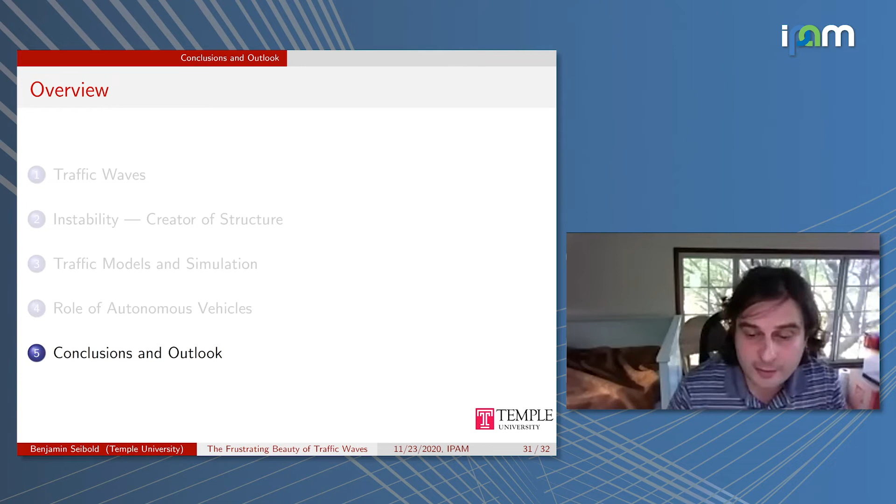So this question comes from Will, and the question is: in the AV dampening experiment, do the parameters that govern the single AV's behavior depend on the global configuration, number of cars, speed limit, and so on, or only on the local information? Also, does effective dampening behavior require fast actions?

Yeah, so excellent question. So what turned out in the controllers that we implemented is that we did make use of some non-local information. The vehicle had access to essentially the average speed of the flow of the other cars around it. And those were the different set points that we tried. For practical purposes, good controllers will probably make use of some notion of what is a good speed to go with. You want to go with the uniform speed.

And this is where vehicle-to-vehicle communication or infrastructure-to-vehicle communication, connectivity, can actually come into the game and really improve the controllers. That being said, all we need is an estimate of what is a good speed to go with, the average speed of traffic flow downstream of you. So it's a relatively small amount of information that's actually needed. The rest is actually local, and for purposes of safety, it's just measuring the distance to the vehicle ahead, with relatively conceptually simple controllers that achieve this.

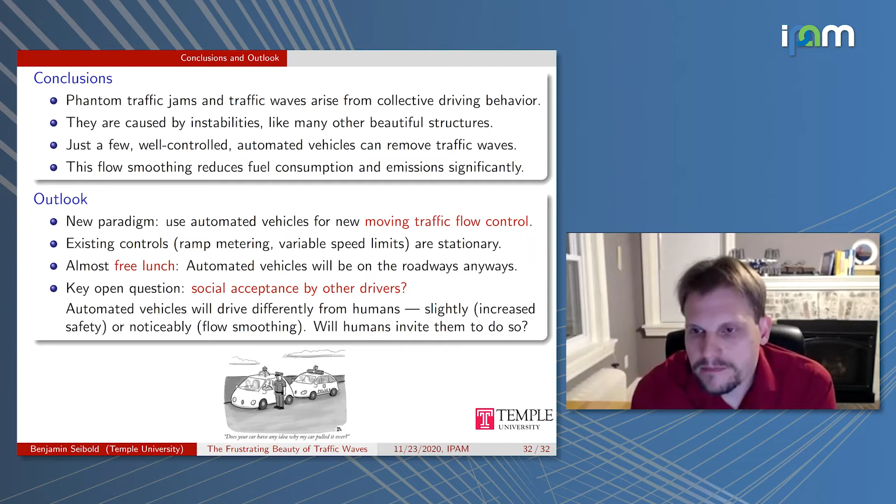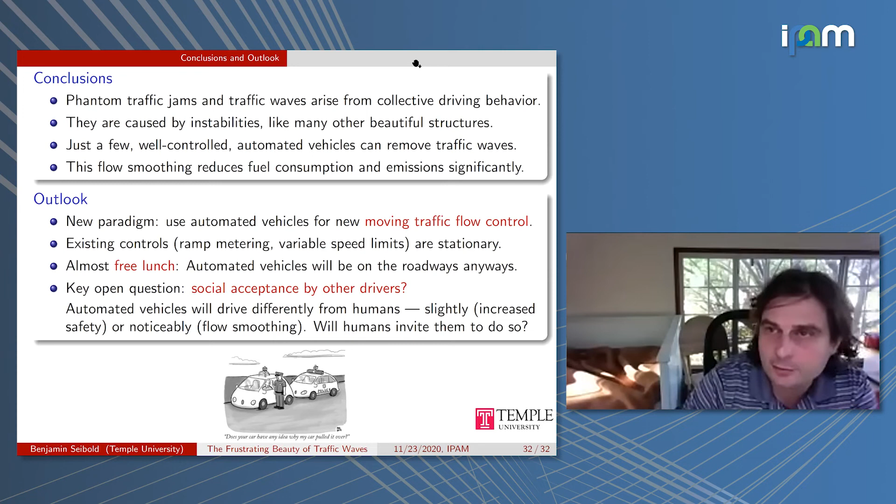I had a question about if you could comment on generalizing this from one lane to multi-lane on highways, and how opening gaps other cars might want to merge into these lanes. Could you comment about that? Exactly right. So when I ended the talk by saying the social acceptance, that is one of the key aspects that really comes to mind, right?

So if you have a vehicle and the vehicle actually does a job of dampening waves, in fact, that doesn't need to be an automated vehicle. It could be a trained driver as well. We tried a trained driver, and some people have done it and even posted videos on YouTube doing this, right?

The key concern is, of course, that the driver behind might say, wait a minute, you're not closing the gap. You're not behaving according to our social norms. So even though the driver or the car does something good, the person behind it might not perceive it this way, might turn impatient, and therefore try to weave around.

But that, of course, might defeat the whole purpose, right? Then cutting in front forces the vehicle to brake for safety reasons. So even though the intent was to dampen the waves, it will be counteracted by the humans around it. So whatever is implemented, there's a lot of different good ideas out there on dampening waves. One always has to keep in mind, how will the humans around it react to this?